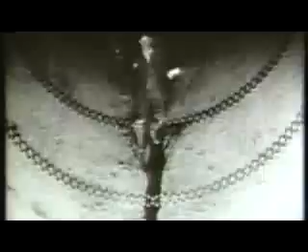For over a century, Ontario Power Generation and its predecessors have invested in the power of water to help fuel the growth of the province. In 1906, the Hydroelectric Commission of Ontario was established, with visionary Sir Adam Beck at the helm. An epic construction project rose on the Niagara River. And in 1922, the world's largest hydroelectric generating station dramatically launched the era of hydropower in Ontario.

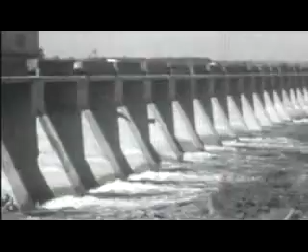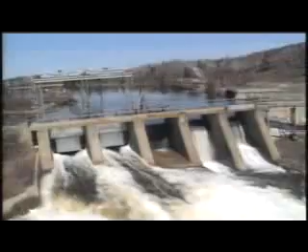Over the following decades, an impressive fleet of hydroelectric stations of all sizes were built throughout the province to supply the electricity needs of a growing population. Producing clean, renewable electricity from the power of water is Ontario Power Generation's heritage. The company is focused on maintaining and improving these treasured assets for the people of Ontario.

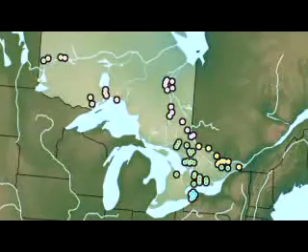Today, Ontario Power Generation operates more than 60 hydroelectric stations and over 200 generating units on 26 different river systems. They also operate over 230 dams to control the flow of water to those stations. At each station, sophisticated automation controlled by Ontario Power Generation's 5 regional centers manages the entire system for maximum safety and efficiency.

Ontario Power Generation closely monitors the flow of water. Official watershed management plans are carefully followed that balance the need for electricity with the environmental, commercial, and recreational needs of all the users in the watershed. Hydroelectric production is very important to Ontario Power Generation. It accounts for about 30% of the power that we produce and in fact represents about a quarter of the power consumed in this province.

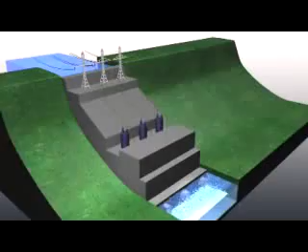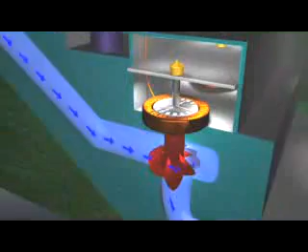Hydroelectric stations all use similar processes and equipment to generate electricity. Water collected above the station is channeled downhill through large tubes towards a type of water wheel known as a runner. The water passing by the runner spins it, which in turn rotates a generator that creates electricity. By the 1970s, some of Ontario's hydroelectric stations had been faithfully generating power from water for half a century.

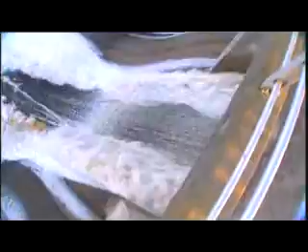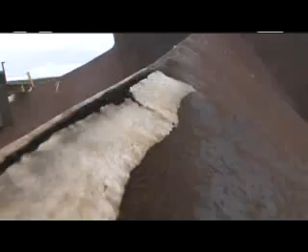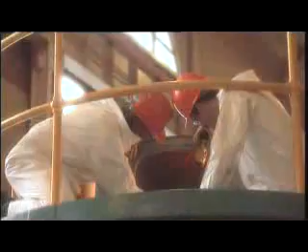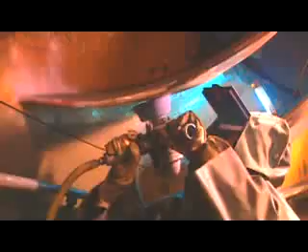Unfortunately, the original turbine runners were vulnerable to a unique phenomenon called cavitation, when water vapor bubbles created inside the turbine collapse and create shock waves. If that happens, it will create pits and eventually holes in the turbine blades, and then the runner either has to be repaired or replaced. Engineers began to explore the options available to maintain the aging hydro turbines into the future. They concluded that modern runner design technology could reduce costly maintenance and offered the added potential to produce more power from the existing plants. The turbine upgrade program was born.

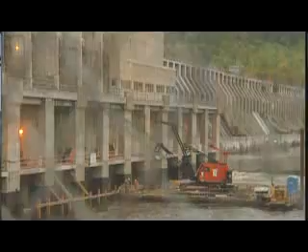The turbine upgrade program is taking the hydroelectric fleet across the province and improving the efficiency of the equipment so that we can get more power from the existing unit. Primarily, we replaced the turbine runner, but we also replaced other components within the water passage to improve the efficiency of the use of that water, in the late 70s and early 80s.

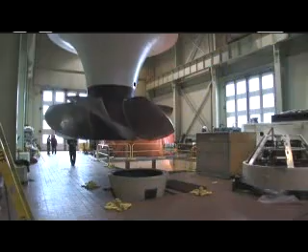The biggest challenge was convincing people that these benefits were for real. Changing a runner was not common practice at all. OPG, Ontario Hydro at the time, was a pioneer, and people looked to us to see how it was done. It takes a bit of faith in your design engineers to go out and take a perfectly good turbine runner and scrap it and put in a brand new one, which is a very expensive proposition, on kind of a technical say-so.

Other companies followed the same practice because they saw what a good idea it was. You could just change some components and get a lot more power and energy. Hydro turbines use water as fuel, and modern runners are capable of using that water more efficiently than the original handcrafted equipment.

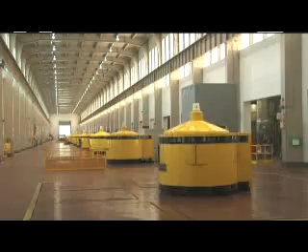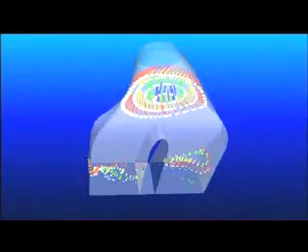Today's turbine engineers use computers to design the replacement components and run simulations to help them test their designs. Finely detailed scale models of the entire generating unit are then built and tested in hydraulic laboratories to further refine the concept. The result is a runner design that virtually eliminates cavitation while also generating more energy from the same amount of water.

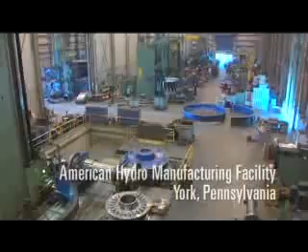Transferring the ideal design from the computer to the real world is a long and technically challenging process. Some of Ontario Power Generation's runners are almost 7 meters in diameter and weigh tens of thousands of kilograms. Yet they must be precisely manufactured to incredible tolerances of less than the width of a human hair.

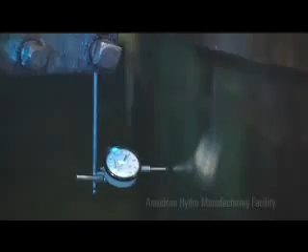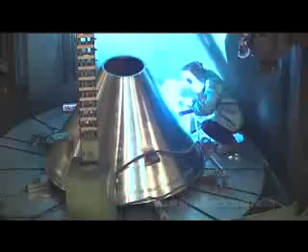Highly skilled craftsmen can take up to a year to build a runner, cutting, welding, and grinding the steel into shape. The technicians carefully wield giant computer-controlled machines to bore and mill the runners to the exact specifications the design demands.

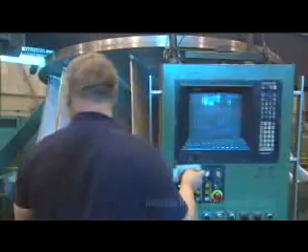The runner blades are also crafted out of advanced stainless steel that resists cavitation, thereby minimizing maintenance costs and extending the life expectancy of the equipment. They're designed for a 60 to 70-year life, but in actual fact, if we don't have cracking or cavitation damage, they could last for 100 years or more.

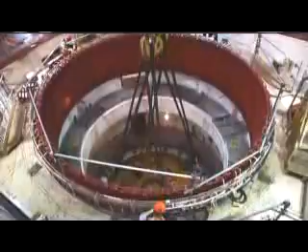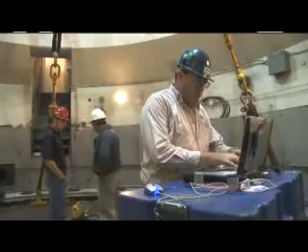Long before the replacement runner is delivered to the station, highly skilled Ontario Power Generation maintenance trades are on site to overhaul other components in the unit and prepare it for the upgrade. Even though the stations are constructed with enormous volumes of concrete, there is minute settling and shifting over time that must be accounted for when aligning all the parts for installation of the new runner.

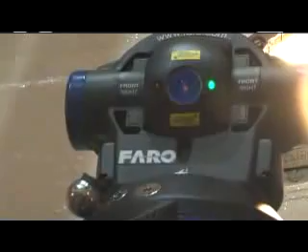A laser guidance system is used to line up the embedded parts to within a few thousandths of an inch to ensure that the turbine operates smoothly for decades. When everything is ready, maintenance crews carefully move the runner into position, and the new unit is bolted into place.

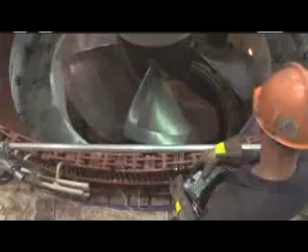The primary advantage of the turbine upgrade program is the additional energy that is generated from the same amount of water at the existing stations. From 1992 to 2006, 427 megawatts of additional capacity have been added to the hydro fleet, with over 125 megawatts in the last 5 years.

Since the beginning of this program, we have upgraded over 115 units across the province. The energy that this additional hydroelectric capacity gives us is enough to supply over 100,000 homes every year. The other advantage is typically most upgraded units have a much higher reliability and a lower maintenance cost. And that's because the designs are better and the materials are better.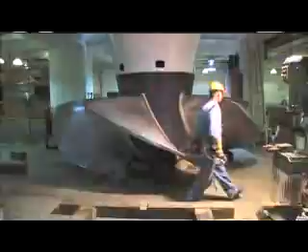Through the turbine upgrade program, Ontario Power Generation is squeezing out every megawatt of hydroelectricity possible. Over the next 5 years, another 53 megawatts are scheduled to be added. By 2012, the turbine runner upgrade program will have added enough clean, renewable hydroelectric power to avoid over 900,000 tons of global warming carbon dioxide every year.

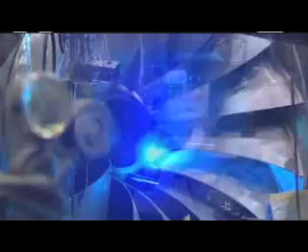Hydroelectric is a clean, reliable, dependable source of energy. It simply makes sense for us to continue investment in these assets. The turbine upgrade program is a good example of that. It allows us to make sure that the water that Mother Nature gives us, we can make the maximum, most efficient use of in our plants.

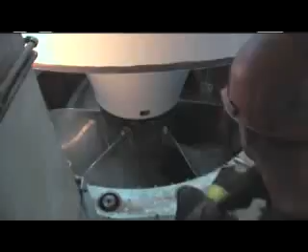And I think all of us are very proud of what we've been able to contribute, and to know that our contributions will continue to produce clean, reliable power.